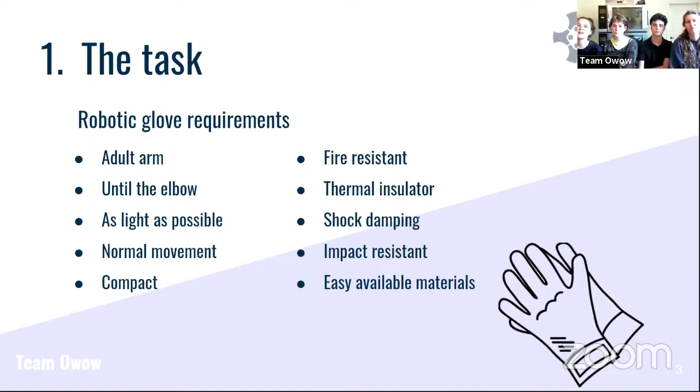We had to make a robotic glove with all these characteristics. It is a glove for an adult arm and it has to reach the elbow. It has to be as light as possible and the normal movement of the hand must not be restricted. When you are not wearing the glove, it has to be compact. Further, it must be fire resistant, shock damping, impact resistant, and heat resistant. It also has to be made from easily available materials.

In order to make this glove as compact as possible when folded in, we chose a two-part design. The hand itself consists of a few layers to deal with heat, fire, and impact, which will all be explained in a minute. The arm is a strong structure that functions as a compact, retractable storage space. The design will allow us to make the hand flexible and fully articulate, but also provide excellent protection due to these layers and the black knobs on top of the hand, which will distribute the load of an impact to a larger area.

All of this whilst the arm remains completely guarded from heavy impacts and heat sources. When not needed, the arm structure retracts in a telescopic manner. This makes it a compact cylinder in which a sleeve and a hand can be stuffed. Since you have two hands, the retracted cylinders can be attached to each other with leather straps.

Now I will describe all the materials. I will start with the hand part of the glove, describing the structure layer by layer, starting with the first layer, the one closest to the skin. The first layer is a sport compressive glove and sleeve. It is elastic, breathable, absorbs your sweat, and absorbs shocks, which makes it very comfortable and a perfect first layer for our Glow-Wow.

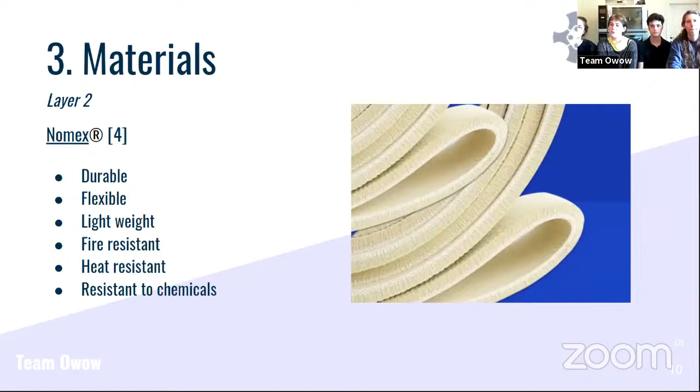The next layer is Nomex. Nomex is especially known for its good properties against fire and heat. It's used in almost every suit of fireman or firewoman, so it's very well known for that. It's also durable, flexible, resistant to chemicals, and lightweight.

The next layer is Kevlar. I think everyone knows Kevlar. It's a very good material, resistant to cuts, and like Nomex, also fire resistant, chemical resistant, and flexible. That's the top layer of our glove.

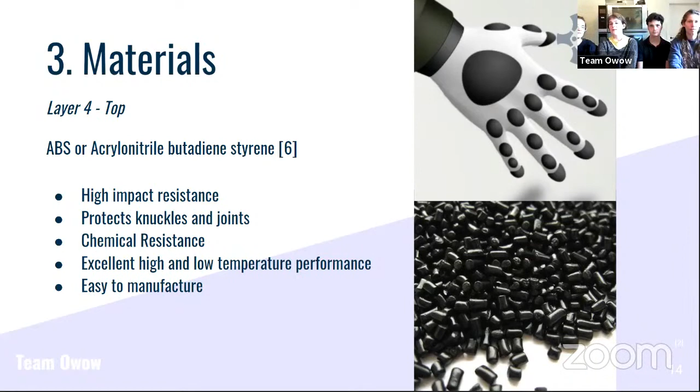The next layer is different for the top and the palm. The top has to provide impact resistance against high impact, and we use ABS for that. It's a strong plastic, and as you see in the image, the ABS is in little black dots just above the knuckles and the joints to protect them. Because it's only there, you can still move your hands naturally and it won't disturb any movement. ABS is also chemical resistant and performs excellently in high and low temperatures. It's also easy to manufacture, making it a nice material to protect the knuckles and joints against high impacts.

The palm of the hand will provide damping and absorb vibrations. The material has a superior damping coefficient, and it's also resistant to fire and chemical solvents. The material we use for that is sorbothane. It's a rubber, and as I said, it absorbs vibration and has a superior damping coefficient. It's also durable.

And the sorbothane layers are placed in strokes on the hand, and between the strokes there is air, so you can still move your hand like this, and no material will be in the way for your hands. So we use that material for the palm, and then we're ready to go to the next part of the glove, the sleeve, and I will give the word to Anka.

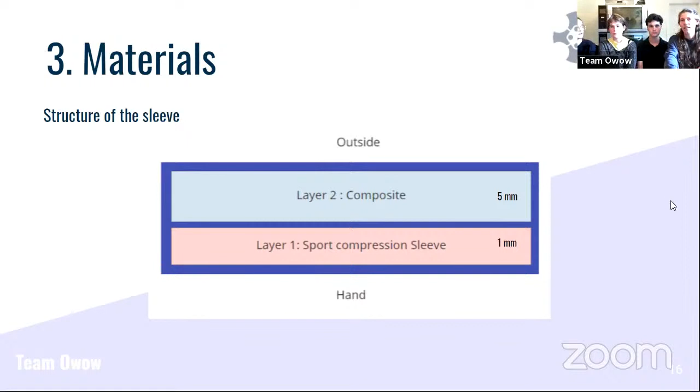So the structure of the sleeve consists of two layers. The first layer is the sport compression sleeve, as Polly already mentioned, which is comfortable on the skin. And then on top of that, there is a hard layer of composite. We wanted a lightweight material that was impact resistant and fire resistant, so that's why we chose the composite Duplicor. An additional advantage is the price and the ecological aspect.

Now, a recap of our concept. Our product meets the task requirements like being compact and heat and fire resistant, but it also has extra advantages like being cut resistant, breathable, and sweat absorbing. So that was our concept. These are our sources that we used, and that was the end of the presentation. Thanks for your attention, and now we're ready for the questions.

Okay, who is first for asking? It's me, maybe? As you want, no, yeah.

Congratulations on the presentation, you have designed a very nice glove, and I think it could be a possible solution, but I didn't understand what kind of people would be the users of this glove — just protection against heat or against fire? And about fire, I disagree about Kevlar in fire protection, because the maximum safe working temperature for Kevlar is 315 degrees. So maybe there are other options, and a mix between Kevlar and carbon fibers could be a nice option, but not just Kevlar alone — just so you know. And my question is, this glove is not interacting with the neuronal parts of the arm, is it?

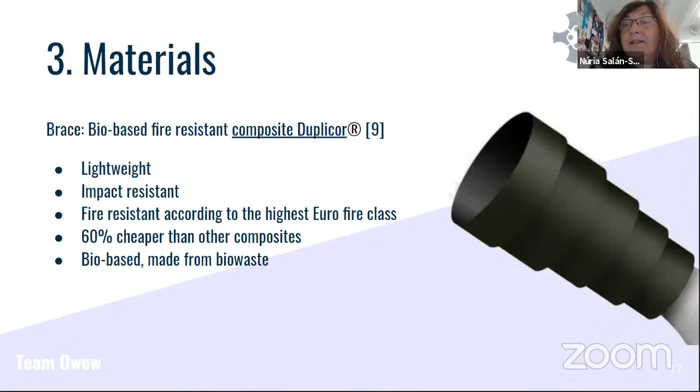No, it's not such a smart glove, it's just to protect you against heat and fire. And about that Kevlar thing, I think Kevlar is knitted into our glove, and if you knit a material you can add other fibers that make it extra fire resistant. So we can add to the Kevlar to make it more fire resistant, and we'll have the cut resistance also in combination. Okay, great. And maybe you know, Kevlar was invented by a woman, Stephanie Kwolek — she was the inventor of Kevlar, the best invention ever.

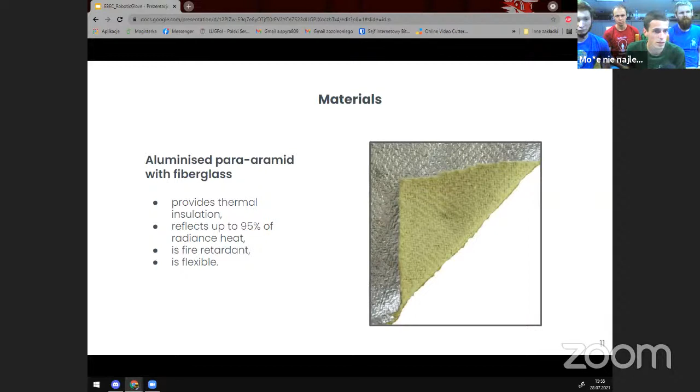The middle layer is made mainly from rock wool. It's the main insulator of the composite. It is very compressible, and that feature is used for active thickness control.

Another material used in the middle layer is silicone. It is used to create airtight tubes around the rock wool and most of the pressurizing system.

The next material is PBI, which is highly resistant to fire and chemicals. It is used in firefighter and astronaut suits.

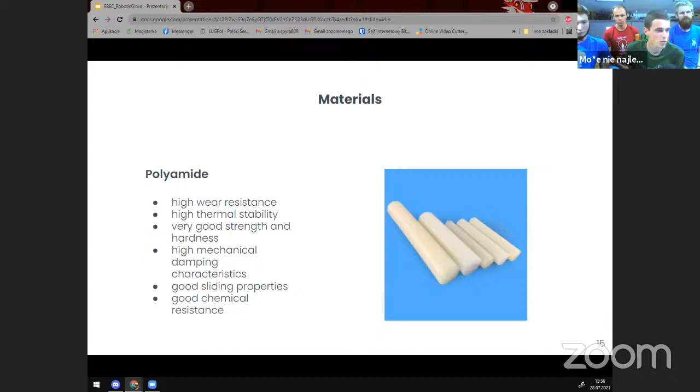Another material used in the middle layer is polyamide. It is used in small strips to grant impact protection. While being strong, it does not break, and it can be bent.

The wool and polyester knit is used on the very inside of the glove. It is very nice to touch, breathable, and naturally prevents odor.

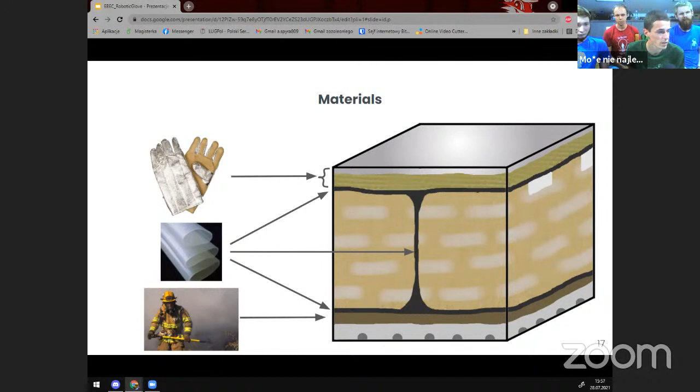The silicone walls create the chambers and make sure the wool is evenly compressed. The polyamide ribbing is placed together with rock wool inside the middle layer. The material on the inside is soft, comfortable, and prevents excessive sweating. Grooving in the polyester wool composite helps with air circulation.

The electronics technology used is commonly found in consumer electronics. The air pump can be made from coils and a silicone bubble, making the whole system flexible and able to be rolled up. In case of electronics failure, the glove can be hand pressurized.

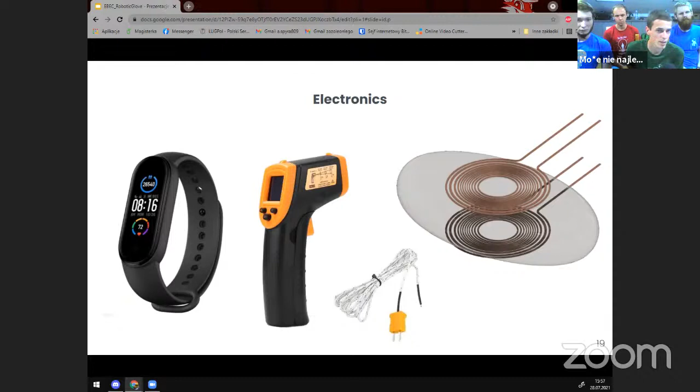We have designed the glove with regard to the presented requirements. Every requirement was considered when the design was created. When it comes to size, the air chambers are resizable depending on the demand. The only rigid parts are placed in horizontal strips, and together that means the glove can be easily rolled up.

Regarding the materials, the ones used are tested and proven to work in extreme conditions. While they are specialized, they are produced in big quantities and can be easily obtained.

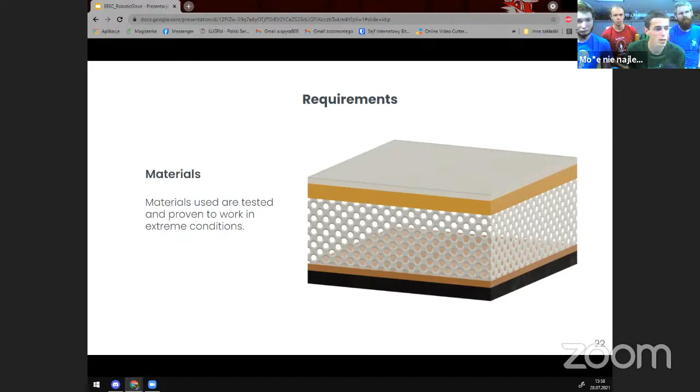Concerning the weight, thanks to thoroughly chosen materials and design, the gloves are lightweight. The rock wool filled air jacket used as the main insulator does not increase the weight of the product, and the total weight sums up to below 450 grams. That is around 25% of the weight of a human arm and will not be tiring to wear.

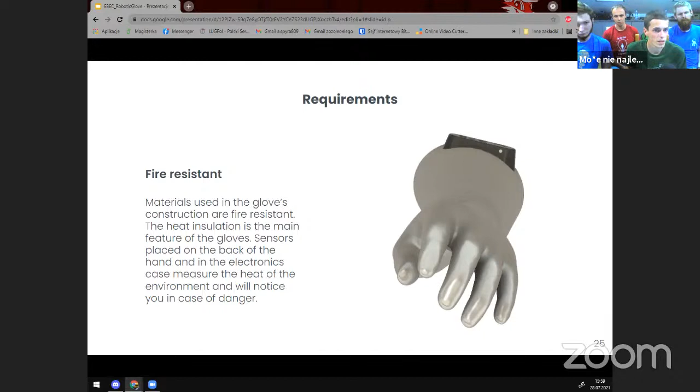While the materials and technology used in glove production are well developed, they are also fire resistant. As we said before, there are sensors placed on the back of the hand and the electronics case. They can measure the heat of the environment and notify you in case of danger.

Concerning shock absorption, the vibrations are dampened by the air jacket and other soft layers significantly. There are no hard materials directly in contact with the operator's hand. When it comes to impact resistance, the air jacket combined with the polyamide ribbing absorbs the impact and spreads it over a greater area.

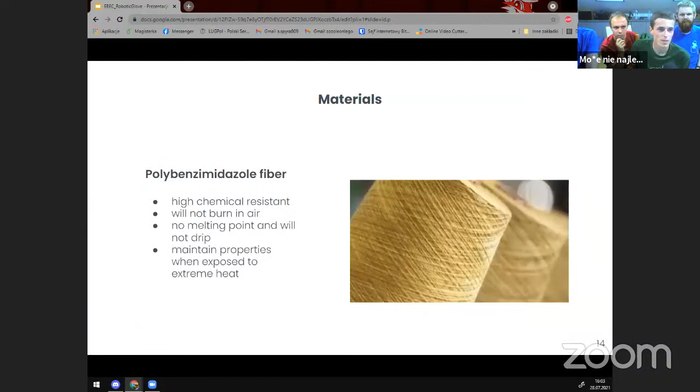Something I don't really understand is how can you adjust the thickness of the whole glove. I understood this is by air pumping, but how big is the system you need and where is it placed into this, let's say here on the presentation? The pump is in here, and basically the whole structure is made of, maybe you have a photo here.

It's like tubes of wool, and inside is rock wool, so it's a very soft material that can be compressed like 10 times. The pump can work both ways: when it is vacuumed, the wool is very compressed and it's like a tight glove, but when the chambers are pumped full of air, the wool expands with them, and the outside material isn't that hard, so it can fold a bit. With the air inside it takes the bigger shape. I see.

So here's what I wanted to come to, related to Nuria's question about impact resistance. I agree that once you have air, you have some dissipation of the mechanical waves, etc. But my question is, as soon as you are impacting that, how good does your pumping system have to be to trap the air?

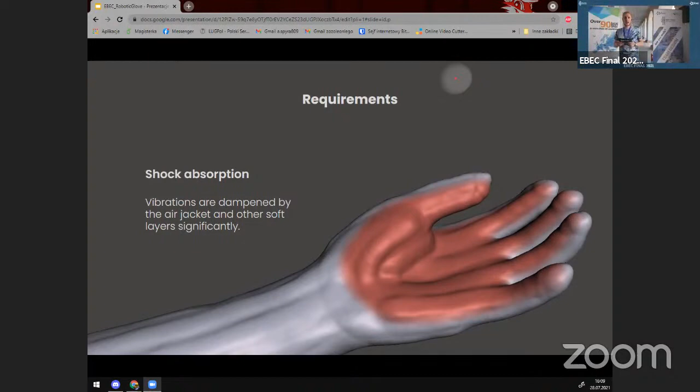Thank you very much. So I will wait for my teammate to share the presentation, and we shall begin. Yeah, I'm working on it. So you should be able to see my screen, right? Okay.

Hello everyone, we are Team Krolog from Brno, and we'll present our solution. I'm Filip, Team Tech Captain. Next to me is Kubo. Hello, I'm Kubo. Also in our team there is Lucas and Dominic.

Moving on. When we started researching for our glove, we took inspiration from many things, like the ordinary work gloves everyone probably has at home, and also it had to withstand forces like impact forces and vibration. So we took inspiration from the armadillo, the small mammal, and also from knight armor.

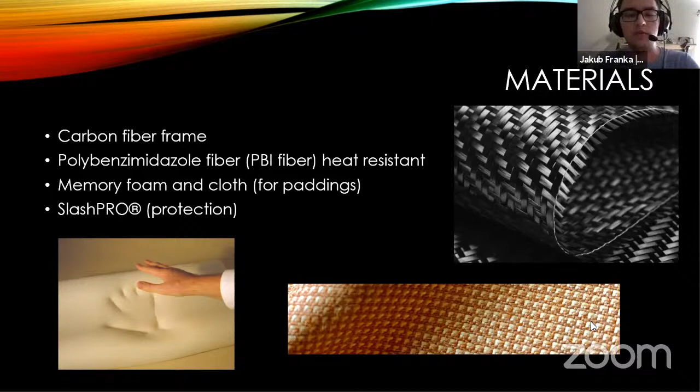Next slide, please. When it comes to materials we used, for the main armor part we used carbon fiber for the frame. We also used PBI fiber, polybenzimidazole, for the heat resisting parts, and for the insides of the carbon fiber frame we used memory foam for comfort and vibration absorption. We covered the entire glove in protection against knives and sharp impacts.

Here you can see the glove, sort of half disassembled. It is built out of three main parts: the hand covering glove, which is built almost entirely of fabric with armored inserts, which is then connected to the forearm impact cover, which helps against heavy impacts and sharp impacts. The inside of it is covered in memory foam, and then the heat protective sleeve is pulled over this impact cover.

Here you can see the layers of the fabric used for the glove and the heat protection sleeve. Here you can see the glove when the heat protection sleeve is pulled over it, and the insides of the impact protection sleeve, also the memory foam inside of it. We also put an armor insert into the glove, which helps protect the upper part of the hand.

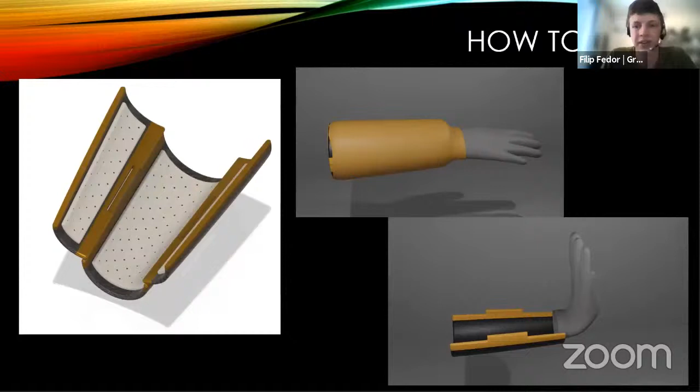Next slide. As you can see, there is an open forearm cover where you put your hand and pad on the glove, then close it, and finally slide on the sleeve. As you saw on the last slide, the whole fabric part can be folded inside the rigid part of the glove, as seen on the video on the bottom right.

Next slide, please. We designed our glove to fit my hand, which is quite big, but in case of bigger manufacturing, we would provide them in standard sizes of gloves, so from 8, 9, and so on. So we will use the standard size for the gloves.

We use a classic water cooling circuit with external cooler, coolant tank, and pump for circulation of coolant, and cooling is necessary for better heat resistance and more user comfort. Next slide, please. It is also, of course, optional because the equipment required for this is quite heavy, and it's better if you want to be lightweight to remove this.

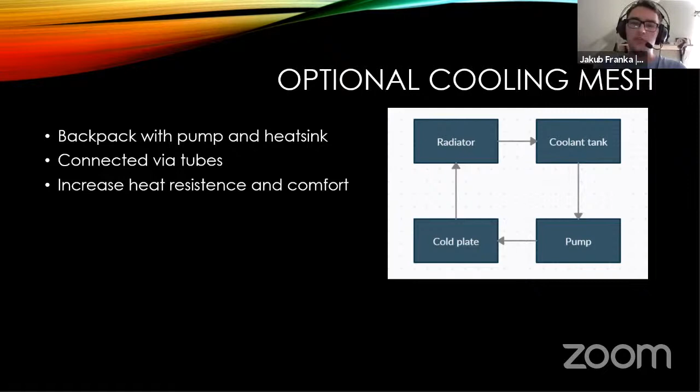So the whole glove is equipped with points to attach the hoses, and the whole cooling mechanism would be on your back in some sort of backpack.

And we also designed a heavy-duty version of our glove. This is more armored and provides better protection and endurance. On the other side, it has limited finger movement. It can be used for special applications with extra hazard of injury.

So that's all from us, and we will be glad to answer your questions.

Boys, thank you very much for your presentation. And sorry, excuse me, I didn't realize to ask about the weight of the elements.

Well, we considered using the most lightweight elements, but for example, the fireman gloves, which we based our design heavily on, weighed approximately 300 grams, I'm not sure. You can say it in pounds. No, well, we use the metric system. The metric, perfect for me. I'm from Spain, so metric is perfect for me. We're all from Europe, so most of us. How many grams?

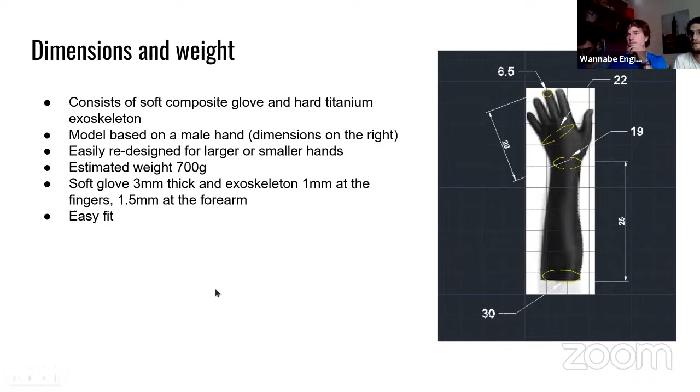Now, the composition of the soft glove. The base layer is neoprene, for shock absorption and comfort. The other layer is 2 layers of Kevlar, which has very high tensile strength and low thermal conductivity. On top of all that, there's a silicone coating spray, which can stand high temperatures, is flame retardant, and if it's damaged, it can be reapplied.

In the hand, we skip the neoprene layer to make it thinner and more agile. On the thumb, it's embroidered with conductive thread, which allows the use of touch screens. All the materials we've used so far can be easily found on common marketplaces.

This is the metal exoskeleton, which protects from hard impacts. The floating finger joints are attached to the fabric with Kevlar stitches, and the box on the back... okay, what's happening? I have a problem with the presentation, sorry.

And the box on the back is a surprise for later. The forearm armor is made of 1.5 millimeter thick light titanium sheet and is designed to fold towards the arm, the hand, like that, as you can see in the video.

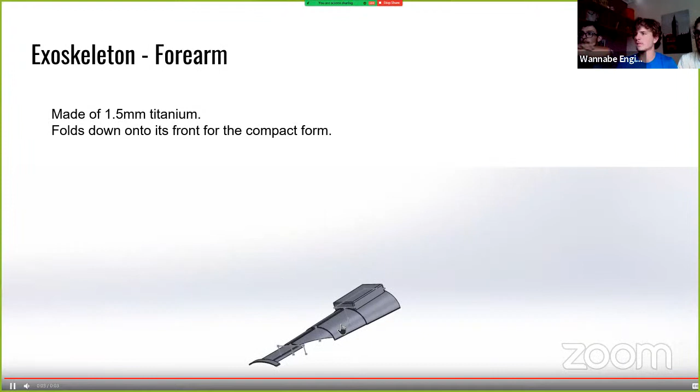So we could have ended it here, but instead we decided to get creative and a bit childish. So we now present our spiced up kitchen glove.

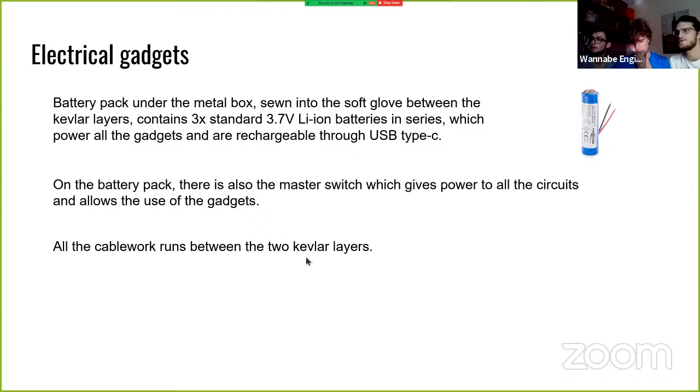All the electrical gadgets you'll see are powered by 3 lithium-ion batteries, which can be recharged with USB Type-C. On the battery pack, which is under the box mentioned earlier, there's a master switch which powers all of the circuits and allows the use of the gadgets. All the cable work runs between the 2 Kevlar layers.

So, how do all the gadgets work with the gestures? How do we detect when a finger is closed? Well, there's a metal plate on the end of each finger, almost each finger, and a metal plate in the palm. So when you close that finger, they make contact, and the logic board gets that signal.

We also have a laser on the index finger, because that's the finger with which you point, and it activates when all other fingers are closed.

Also, we do have a lighter. It's positioned on the thumb, and it activates with the thumbs up gesture. It's an electric lighter, so it produces a spark, and then our LPG tank, liquefied petroleum gas, provides enough gas to keep the flame going for as long as you keep this gesture.

We also have a non-electric gadget, a screwdriver, because we are engineers. It's positioned on the pinky finger, and it's also detachable, so you can change heads.

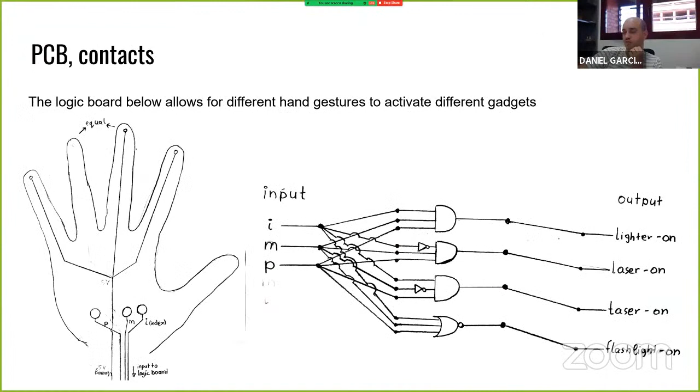I have actually worked on impact response of different plates for very high impact, and we considered aluminum and titanium. To be honest, I agree that probably regarding just the stiffness, tensile strength, etc., with titanium you are more than okay. Not sure, maybe regarding—because you have a kind of flame, right? For one of the—by the way, I can do it. Nice.

Okay, so regarding this, I was wondering about the fire resistance of all the surrounding elements there. You mean the fire resistance of our gadgets? Yeah, so all the surrounding tissues.

Well, okay, so about the laser, there are industrial lasers even used in nuclear reactors, so we're sure we can find one that would be completely fire resistant. Also, the taser posts are just metal, as are the screwdriver and the LED, so we would find some metal that would be fire resistant enough. The only problem left is the cable work, so that the insulation doesn't melt — that can be made with fiberglass, which is quite fire resistant.

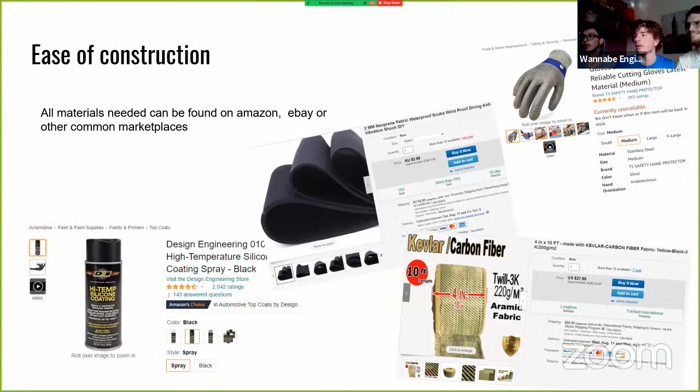So of course the gadgets are optional. Our initial design was the previous one we showed. We're sure they're not that resistant as a glove itself, but the glove itself we think is feasible. All the materials we used, we could find them on the internet. These are screenshots from Amazon and eBay, literally.

Now, putting all the cable work between the two Kevlar layers would be somewhat tedious, but it's fun, it's worth it. I have more questions, but I think we're running out of time.

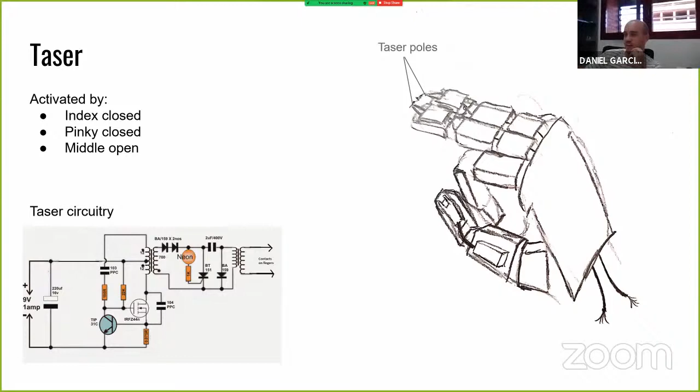So congrats again, I think this is quite creative. I don't know if Andrea wants to add anything.

I also would like to congratulate. I think the work is nice and the presentation was very enjoyable. I would also say it was also fun.

One little comment I have is related to the lighter. If you're in the middle of a fire, you're probably not willing to smoke a cigarette or something. Also, I am afraid the liquid gas there might be risky if you have an impact on top of it and the gas escapes. Also, if you have a fire, it's not a nice idea to have something on your finger which can explode somehow.

Yeah, that's completely true, we agree, but it was just for fun. We wouldn't suppose that firefighters would wear this glove with the lighter equipped.

But okay, thank you very much. Thank you. Okay, thank you. Bye-bye.

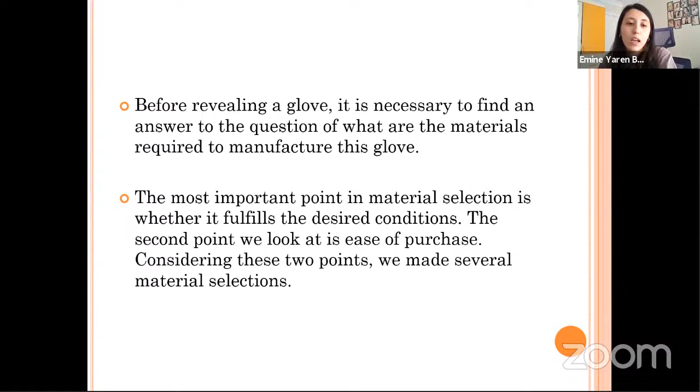Considering these points, we made several material selections. The first one is Kevlar. Some groups use that, and Kevlar is the material inspired by the structure of the spider web. The spider web is the strongest material in nature—it is 5 times stronger than steel of the same weight. We can look at the picture of the Kevlar.

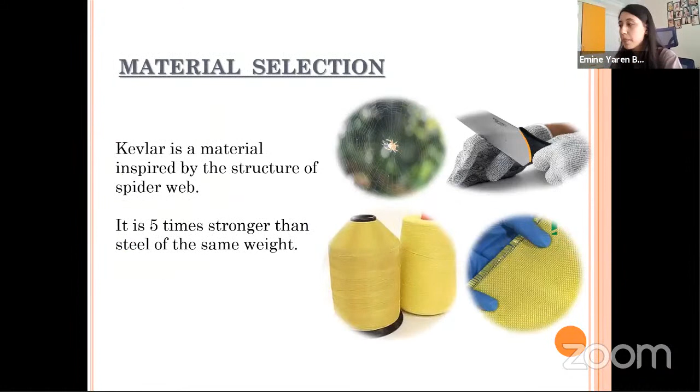Next page, thank you. It's light and extraordinarily strong, with high strength and high cut resistance, low electrical conductivity, high resistance to high temperature, and high chemical resistance, with a thin filament structure that withstands very high tensile stress. You can buy and weave different lengths of yarn, as you can see on the website—you can supply it there.

But we may have issues with D3O material collection, that's why we didn't want to use this material. We decided to use rubber instead. Rubber has shock absorbing properties. It can be produced in different hardnesses according to the content in the mixture. In this way, it is used in different sectors.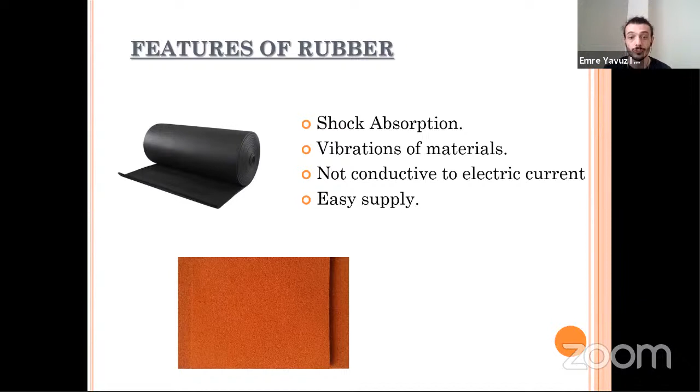The absorbent properties of rubber make it a useful substance in automobile suspension. Rubber also dampens the vibration of industrial materials. In addition, rubber isn't conductive to electric current, and therefore it can be widely used in areas such as insulation and isolation. In terms of availability, it can be easily found in the markets.

Temperature control fabric. We decided to add fabrics that can change color with heat to the glove. However, we did not use the fabric on the entire glove, considering there is a possibility of ignition in the opposite situation. We added it as stripes for the indicator.

Why did we add this? Let's imagine that many people will use the glove in different work areas. Everyone's heat threshold isn't the same. For this reason, next please, so you'll be able to see the color changes.

Next, touch screen feature. At the same time, we added fingertips to the glove which provide ease of use with touch screen. We think this is an important need in today's world.

For example, some workers in industry work with CNC machines, but they work by removing their gloves because the use of gloves isn't suitable for touch screens and doesn't offer comfortable movements. As a result, we encounter occupational accidents such as loss of hand or limb.

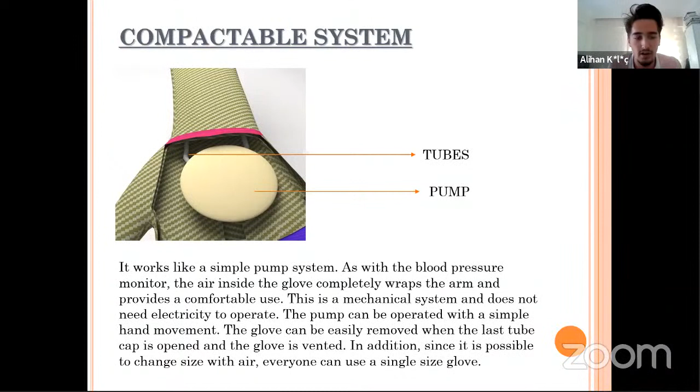This is a mechanical system and doesn't need electricity to operate. The pump can be operated with a simple hand movement. The glove can be easily removed when the last tube cap is open and the glove is vented. In addition, since it's possible to change size with air, everyone can use a single size glove.

It's the working principle of our design pump system. In the example animation, you can see that the pump is inflated and deflated.

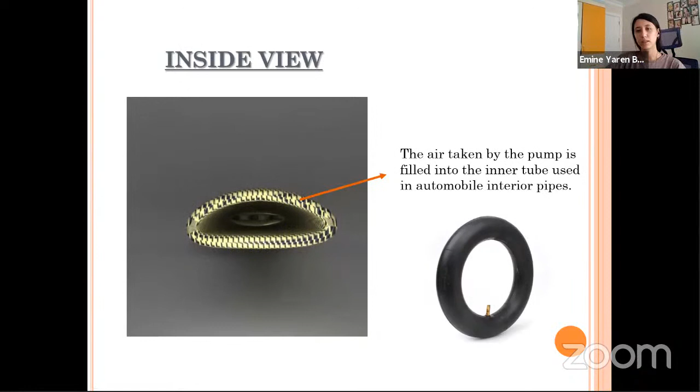Okay, this is inside view, this is the principle of the working. The air taken by the pump is filled into the inner tube. Inner tube is a word in Turkish, but what can we explain in English exactly?

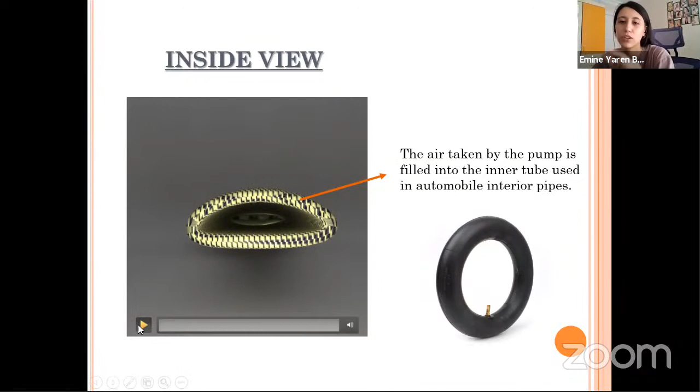This is like this, but we can use the term, like the balloon. It's the layer of our gloves. You can see the size of our layers. We use less than 10 millimeters.

Rubber, Kevlar, air. Inner tube is included as shown on the previous page. The types: a twice layer of polyester and cotton.

We use that because the inner tube or Kevlar can be harmful to the skin, so we use polyester and cotton - no, not cotton, because this can be burned.

Last page. The design of our glove. You can see the rubber. We prefer to place the rubber because of the freedom to move your hand.

These are some codes, our materials. You may find some pieces of these on the internet. Some features like that.

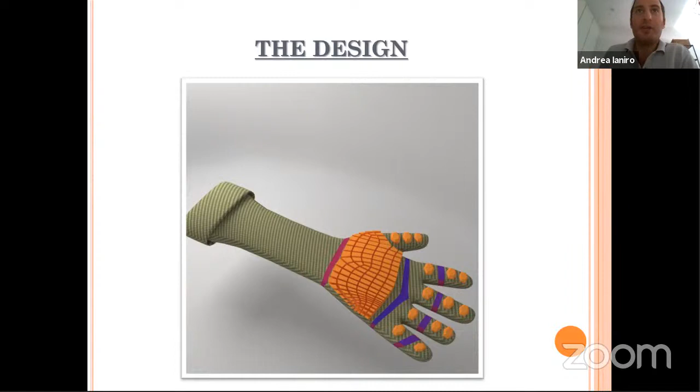I agree with Daniel, and I would have also used the non-Newtonian fluid to better absorb the shock. If I can say, I really like that you included the budget, which shows that this device, although perhaps less complicated than others, is very cheap and affordable. I like that.

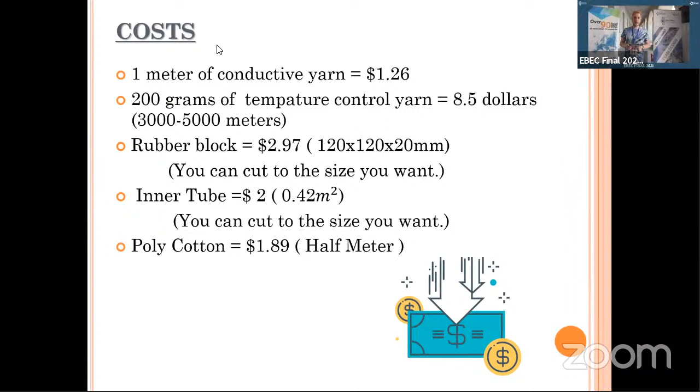So can you see us? Yes, okay. Can you see the presentation? Yes, perfect. Okay, so yeah, we have it, already done.

And what was our task? Our mission was to create a lightweight, shock, impact, and fire-resistant glove that, moreover, would be even foldable.

So how did we manage to do this? We decided to make a three-layered design, a three-layered construction for the glove. It has thermal and mechanical protection, shock and impact protection, and a layer for user hand comfort.

This glove is made of lightweight materials, and there are stiff zippers to put this glove on easily and to take it off.

So what about the outer layer? We decided to make it of meta-aramid, or how it is called, Nomex. We decided between two materials, Kevlar and Nomex. Kevlar is also good for thermal protection, but Nomex is much better, and it's used by firefighters, and it's easily accessible in a household.

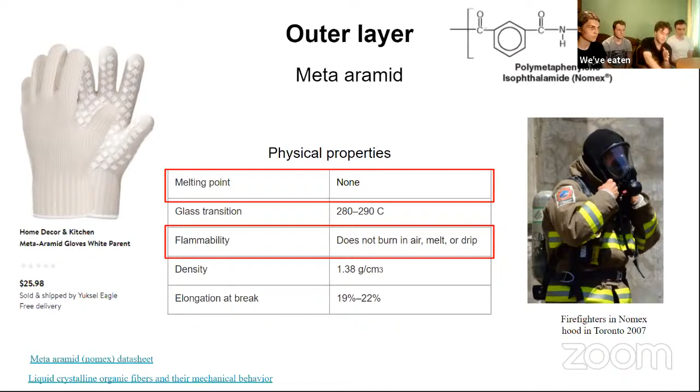As you can see, it could be bought in Walmart, and it has perfect fire protective properties. Let's see the tests.

But what about shock and impact? We looked at different anti-impact materials, but most of them have drawbacks such as being rigid, restricting movement, and being heavy.

So then we switched to D3O. It's a revolutionary material that is soft and flexible in the normal state, but when high pressure or force is put on it, it becomes very strong and disperses all the force. After that, it just returns to its normal state.

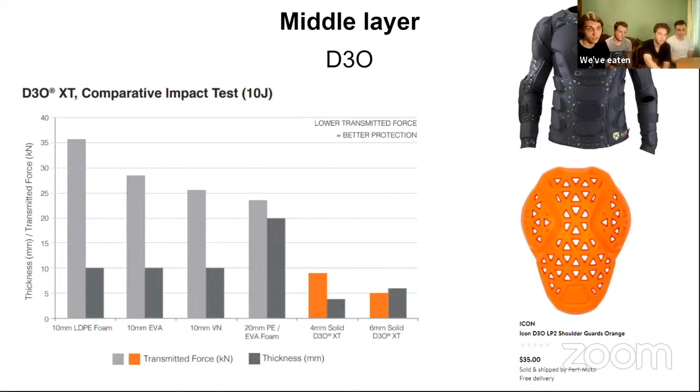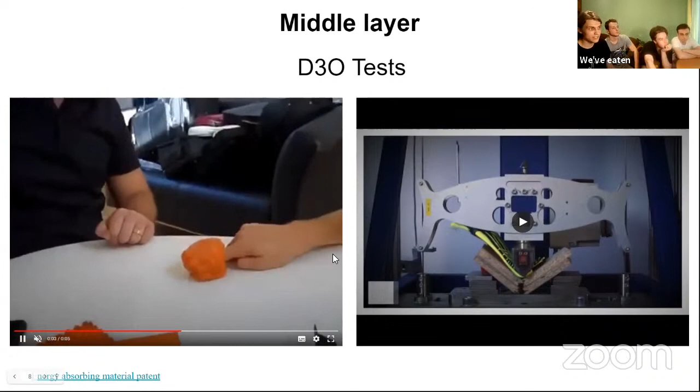As you have seen, you can buy it, for example, in motorcycle shops. Let's look at the test - this guy feels great, and his finger too. And what's more important, in this test of different gloves we looked at different materials like this one, but now look what D3O is capable of. Pretty cool, no?

Okay, so for the third layer of our glove, we decided to pick cotton because it is comfortable. It is also hypoallergenic, and we picked it because it is low cost and easily accessible around the world, so it is not a problem to get this material. Another great property of cotton is that it is eco-friendly, so it can be very easily recycled.

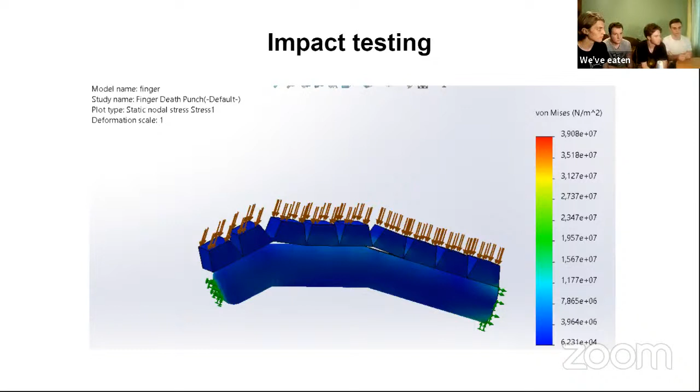So what about impact testing? Here you can see the finger test. There is pressure on the finger comparable to a 2 kilogram material being thrown on the finger in our glove. We ran the same test on the forearm part of our glove, and the results are almost the same as for the fingers.

Okay, now look at our virtuoso. As I said, our glove doesn't restrict any movement, as you can see. He even couldn't play the guitar before he wore it. And as we said, we didn't make something that exists only in a virtual environment. It exists right here, a real device that, despite being made of other materials, has great protection from impact, temperature, and other stuff. Thank you for your attention.

Well, boys, congratulations. I think it's been the most feasible option so far. So congratulations again. Thank you.

And I love your outfit for playing guitar. I'm kidding. My question is, how easy is it to have different sizes? Your hand is your size, but people have different sizes - small, medium, big, extra big. So how difficult would it be to have different sizes for this kind of glove?

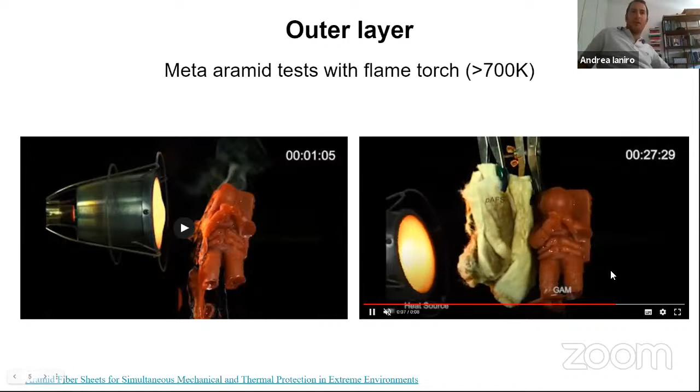Well, but here it's a radiative transfer, and you have emissivity and so on. So in your simulation, it's 6 minutes. Yes, yes. Okay, excellent. Thank you. Okay, thank you very much. Thank you. Thank you for the good words, we really appreciate that.

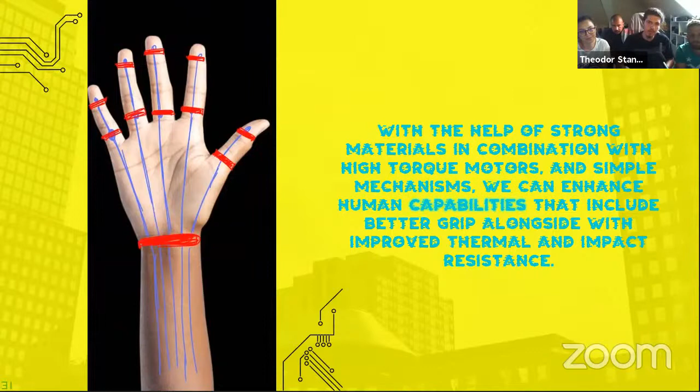With the help of strong materials in combination with high torque motors and simple mechanisms, we can enhance human capabilities, including better grip alongside improved thermal and impact resistance. For a better design and to ensure proper dimensions, we scanned one of our friend's hands to have it as an accurate 3D reference. This process was made possible with the help of photogrammetry.

Our device is comprised of tungsten wires, PTFE tubes, a control box with electronics, 5 high power servos, and a 3-layer sleeve through which all of our components go. The mechanical design is based on already existing principles used in things like bikes and other widely used pulley systems like the BOA, a self-tightening pulley mechanism used in sportswear and clothing.

Tungsten wires go through the tubes that connect the tip of the fingers from above and below, with the wire being wound on a pulley system on each motor. This way, one servo can control both directions necessary for extension or retraction of the fingers.

In addition, the motors are rated for 25 to 30 kilogram-centimeters and work in a closed loop. Electrodes embedded in the sleeve monitor electrical signals as secondary input for the motors, gaining precise control for each of them.

The sleeve is made out of 3 layers, as you can see here: an outer aerogel-infused textile for heat protection, a middle layer made out of Sorbothane for impact absorption and dissipation, and an inner fabric layer for comfort. The total thickness of the sleeve alone is less than 10 millimeters. The Teflon or PTFE tubes run throughout the Sorbothane layer so they don't get pinched.

The wires are permanently sewed to the inner layer, and length adjustments can be made by winding the wires more or less on the pulley system. Our total weight is about 250 to 300 grams, most of the weight being comprised of the control box and servos. Last but not least, a flexible LED light is fixed upon the back of the hand for quick access to a light source.

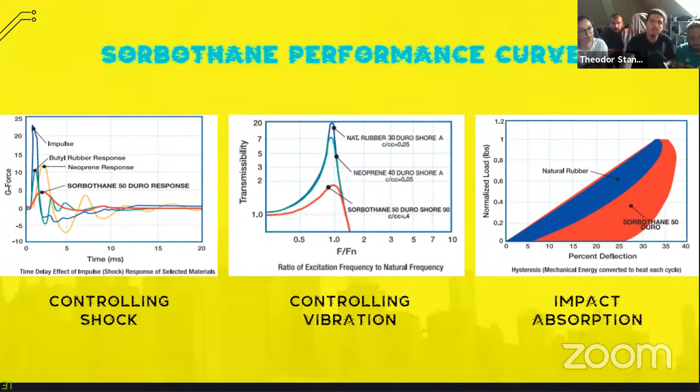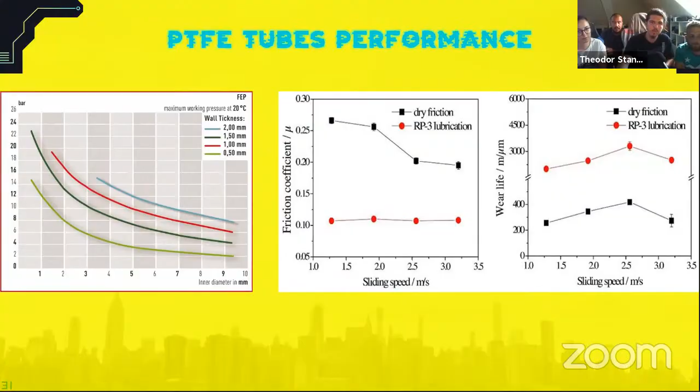The 3mm outer diameter PTFE tubes provide excellent dry lubrication for the wires, Teflon having an inherently low friction coefficient. Tungsten wires provide mechanical actuation of the fingers while also ensuring very high tensile strength, which is important to prevent them snapping under continuous stress.

To make the Cyber Touch as versatile as possible, the motors actuate in a closed loop response based on the rotation of the pulley at every finger's move. If you extend your finger, the wire on that side extends, making the pulley spin and initiate the servo. To ensure precision, electrodes were carefully placed along the forearm to monitor electrical signals.

Based on the intensity of the current flowing, the motors can lock up, helping with grip. The gloves are also equipped with grippy vulcanized rubber, touchscreen compatible pads.

Because we wanted this device to be used by many other types of people, we included a flexible LED light on the back of the hand. The light can be turned on with gestures that are recognized by the previously mentioned input methods.

Additional accessories can be developed in the future to enhance the ability, such as magnetic holsters, low power e-ink displays, and additional battery compartments or motor upgrades.

For most use cases, we decided to go for a high power servo, but depending on the necessary torque, smaller motors can be installed, making the control box shorter and even smaller overall.

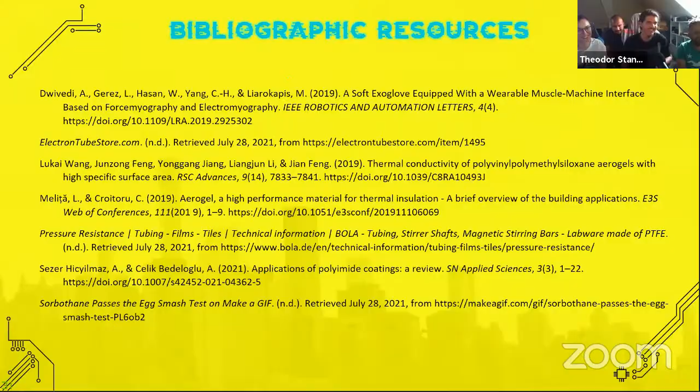Okay, congratulations, a very nice and clear presentation. Good job. And just a question, a curiosity more than a question.

Why tungsten wires? Through research, we found out that these have the highest tensile strength of the available wires on the market, or one of the higher ones at least that we found, at about 2,300 megapascals per millimeter square.

Yeah, that's true, but I think, maybe I'm wrong, tungsten is a very resistant metal in compression, but not in flexure or tensile, because it's so brittle. So I'm not sure it's the best option.

And I'll repeat what I said to the other team. Maybe it's the most resistant material, but what is the maximum stress that can be applied to your device? Maybe you don't need a tungsten wire, and you could consider a more common, more flexible, more ductile metal that isn't as brittle as tungsten. That's my question, that's all.

Sorry, I hope you like the information. Now we're gonna get a little bit serious about our prototype. So I'm gonna talk about the constructional solutions that we came up with to assure protection against some of the most common hazards.

The outer layer of our prototype is made from aluminized Kevlar fabric, which provides high temperature protection as well as vibration damping, since we know from other sources that this material works. We chose 1.5 millimeter thickness because, with the help of other materials, we'll also have extra thermal insulation capabilities.

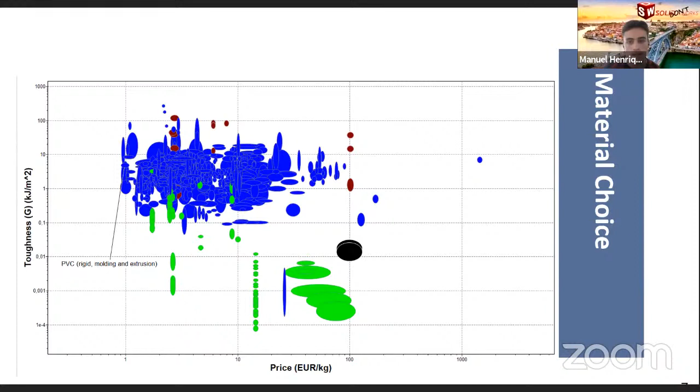We also compared the melting point of the previous materials, so the gloves can handle high temperatures. Based on these two graphics, we picked PVC because it can absorb impacts, it's cheap, and it has a decent melting point.

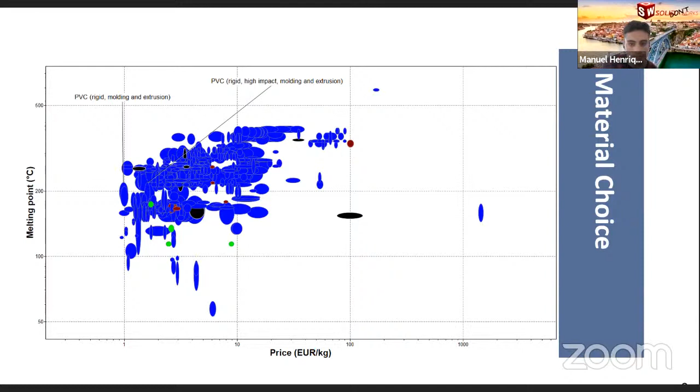Talking about the final design, it has 160 grams. The walls of the glove have 5 to 6 millimeter thickness, so they are easy to maneuver and use. The glove has a Velcro strap in the middle, and you can fold the glove so it fits in a small compartment.

One real question to ask is, why did we choose such a simple design? One of our main tasks was to have something we could easily manufacture and that would be really cheap. In a world where there are so many complex designs, we chose to simplify it.

We thought about other types of solutions, but we saw problems. For example, exoskeletons or telescopic solutions could run into problems in the future with a lot of use cycles. Ultimately we chose low weight with good material protection, simple to manufacture, and a beautiful design.

In terms of price, it's relatively cheap. The highest price was the Kevlar layer.

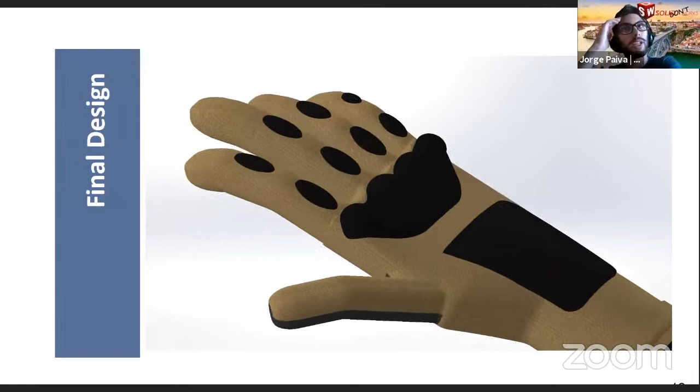To sum up, here is the ultimate glove you need. Lightweight, and it protects all your arm and hand from fire and heat thanks to the layer construction. It's capable of protecting from impacts, vibrations, and sharp objects, thanks to the Kevlar layer and the polyethylene foam on the critical zones. It's comfortable thanks to the cotton inner layer, and it's super practical to store with the Velcro movable sleeve and the maneuverability that allows it to fold completely. It fits just like a smartphone in your pocket.

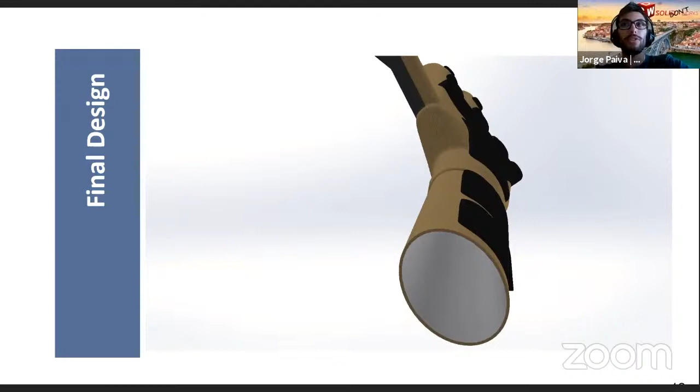So I think this option could be as easy to get as in your commercial movie. And my only question is... I have no questions, it's just like a comment. Do you think it could be possible to have a glove like this in a laboratory for working, in practice, in academic activities, in an easy way, or at home like that woman who was ironing?

And I must say to you that men can iron also. It was me, it was me.

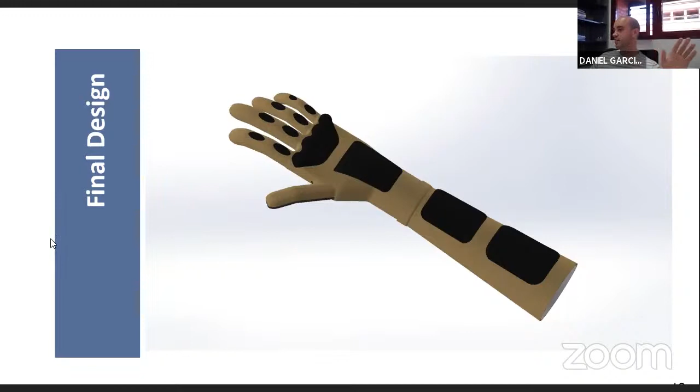Okay, congratulations for the presentation and the design. I actually have kind of contradictory feelings. On the one hand, from the scientific part, I think this is quite simple, but that's true because this is your purpose, right? On the other hand, the marketing stuff is extremely good. I really like it, and I feel that Mario is the one risking his life, cutting and doing the whole stuff in the video. So now let me give you a shot: try to tell me in half a minute, more from a technical point of view, 3-4 reasons why your design is better than others. I got the marketing bit, but now from a technical point of view, try to sell it to me.

I think one key point, as the competition asked, is the fire resistant part. The aluminized Kevlar fabric really makes a difference, that should be one point. And maneuverability, our design is really good on that key point, which was important. It was one of the most feasible solutions we came up with this afternoon. We also truly believe that the PVC plus polyurethane foam is a really good solution for absorption, and it's a really easy one too, quite easy to manufacture.

Okay, last question: if you need to change something, or if you can change something in your design, which change would you propose? That's a good question.

Regarding the impact aspect, from the technical side, I actually tried to predict the impact behavior, but those kinds of nonlinear dynamics analysis are difficult to do with the normal software we have, since not everyone has software capable of running those types of simulations, and given the lack of time it would be very difficult to prepare such a study in such small time conditions. However, if we could improve the impact aspect of this glove, we could extend the protection layer to the whole arm. Of course we'd have to discard some mobility, or we could change the material to something more resistant, like PEEK, or as was said before this afternoon, some non-Newtonian fluid or something like that.

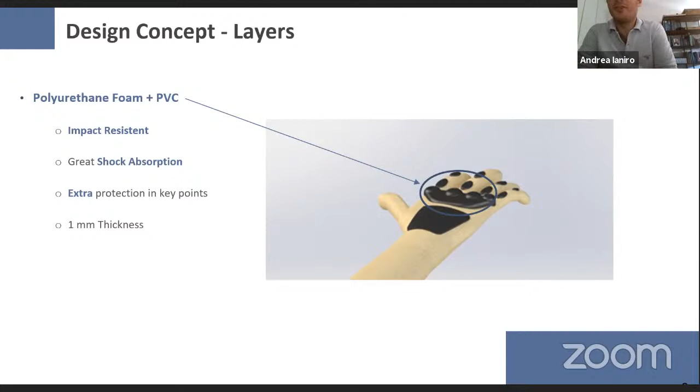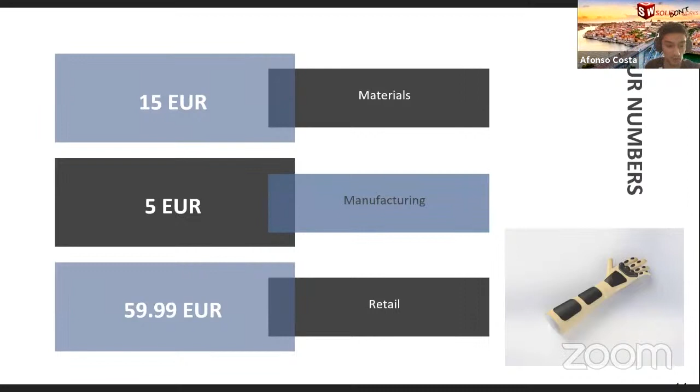Oh, we ran some numbers, it would be relatively cheap. The PVC is real cheap. The highest cost would be the Kevlar material. The problem here would be the quantities of the materials, right? The problem is not how much the materials cost, because the materials used are relatively cheap. PVC is cheap, the most expensive material used is Kevlar, which is like 25 euros per square meter or something like that. The problem here would be the manufacturing prices, but if you could make it at large scale, it would be a relatively low price for the kind of protection that we offer. Okay, thank you very much.

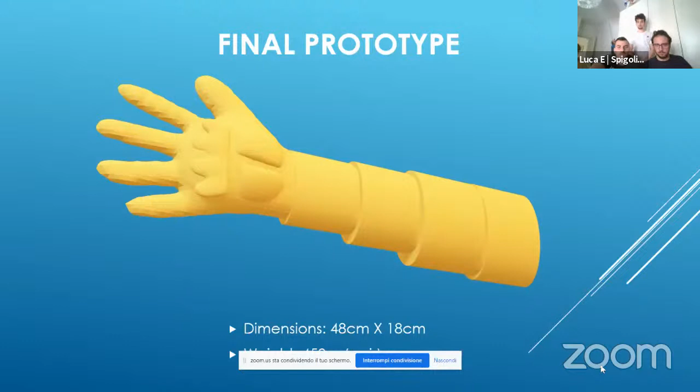This is our prototype, and as you can see, in the lower part of the slide, here are the overall dimensions and also the weight of our prototype for a pair.

Regarding the material used for our prototype, we made it of different layers. Each layer has a specific function to satisfy a different customer requirement. In particular, we paid a lot of attention in the positioning of the layers, because if you use the wrong positioning, the glove will change its features. In total, we reached a thickness of 8 millimeters. But now let's move to the layers in the specific.

Okay, so let's take a closer look at the single layers. The outer layer is called outer shell, and is composed of a fabric of multi-filament technology of Kevlar and Nomex in order to achieve exceptional strength, flexibility, comfort, and exceptional thermal properties.

Then we have a thermal layer that is under the first layer, that is a key layer to insulate the user from the fire, from the outer things that could harm the user. And it's very important. It's composed by a batting of Nomex E89 and a fabric of Nomex.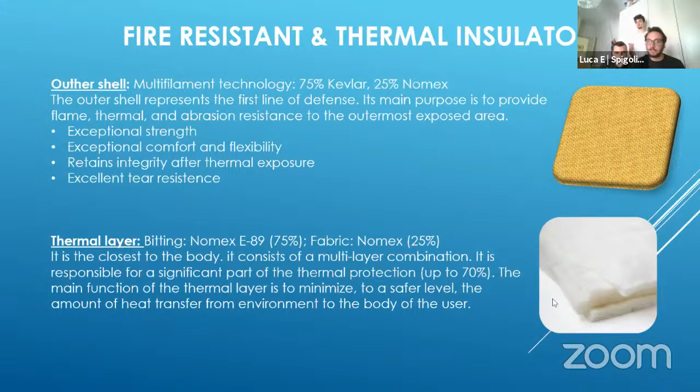Then we have the impact resistant and shock absorption layer. This layer is composed by a viscoelastic foam with memory effect. We decided to use this material because we searched on the internet, and this material had exceptional properties regarding impact absorption.

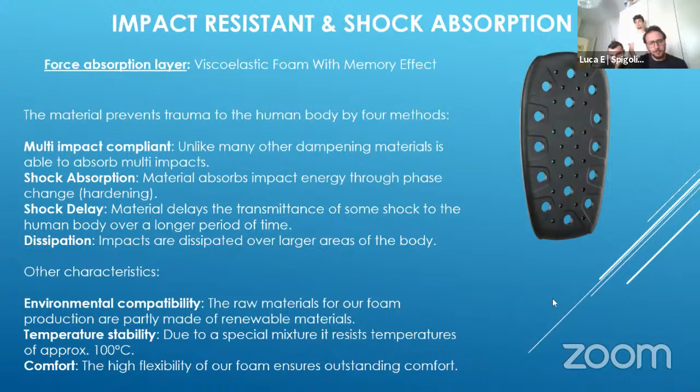It is also impact compliant, and it is able to dissipate energy during impact, protecting the body of the user. It also has a lot of interesting features like environmental compatibility, temperature stability that is very important in a glove that has to resist fire, and then last but not least, comfort.

We decided to position the layer, as you've seen before, in a strategic position. So on the arm, where the user could be beaten from something, and on the palm of the hands, and also on the back of the hands, in some padding.

Okay, so let's talk about comfort. Comfort for sure is very important for a glove, and this is the reason why we add in the inner layer a layer made of cotton, which for sure has a good feeling on our skin.

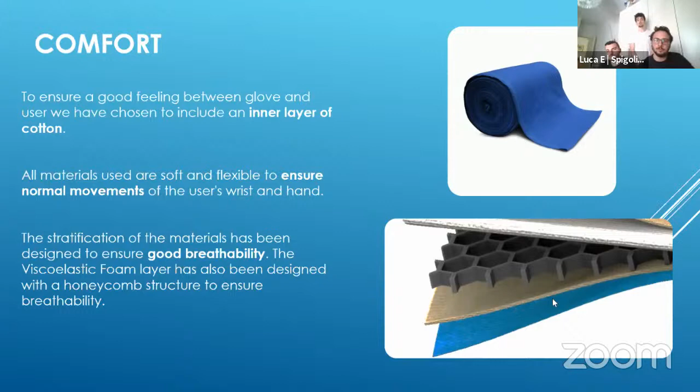All materials that we use are flexible, and this is very important to ensure for the customer the normal movements of the hand. Also, breathability is very important for gloves, and this is the reason why all the materials we use ensure good breathability. The only layer that probably has some issue in this case is the impact attenuator layer, and this is the reason why we chose to have a honeycomb geometry to solve this problem.

The glove is also meant to be retractable, and as I said a few seconds ago, all the materials that we use are flexible, and also the impact attenuator layer is very flexible, as you can see in the photo in the slide.

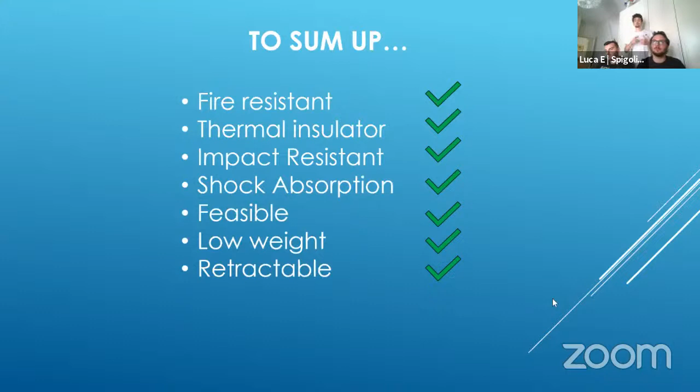So to sum up, our product is fire resistant, is a thermal insulator, is impact resistant, the shock absorption of our gloves is very good, and the feasibility is absolutely good. The weight is not too much - one glove weighs only a little bit more than 200 grams, and it is retractable. As a team, we are very happy because we respected all the tasks using a very simple geometry and very simple material, and this makes us sure that our prototype is able to work and be produced without any problem.

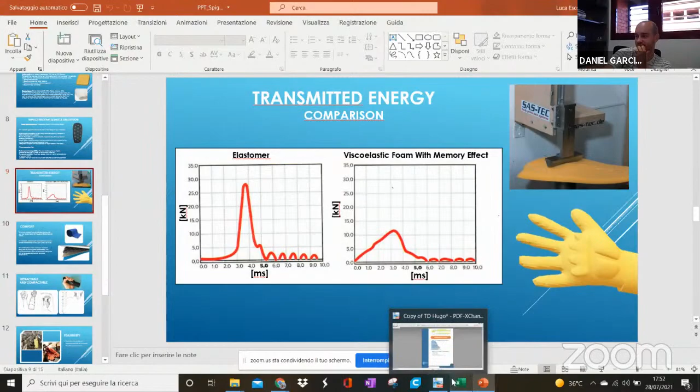Okay, thank you very much, and congrats again. Thank you. Congratulations, thank you. I think the work was nice, the presentation was clear.

I also found a lot of quantitative details. You don't mention much about the price, how much would it cost? Okay, so we didn't work a lot on the price, only because it wasn't a task, but we are sure that the cost is more or less elevated, because all the materials we used are commonly used in firefighter equipment, or in sports equipment, so it could be in line with the cost of that kind of equipment. Also the processes used in the textile industry are commonly used, so probably we only need the textile production, and the layer for the impact attenuator is made of a very flexible material, easy to be sewn, shaped in any form, because at the base of production it's in liquid form. So it can be stamped into the shape we need, and it's not very difficult to obtain.

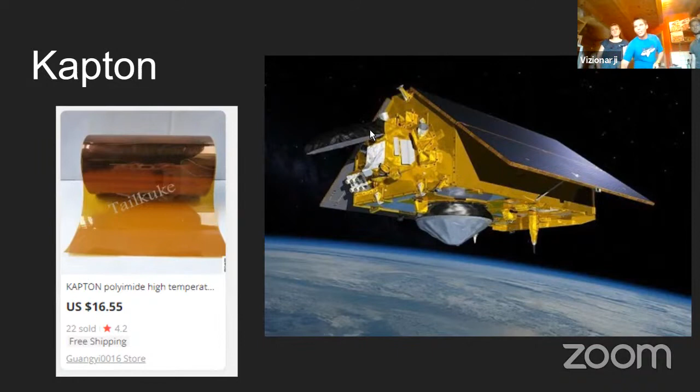Let me tell you what we were inspired by. We were inspired by air and air bubbles, and you will soon see why. The materials we've used: first one is cotton, which is comfortable on the skin, and that's pretty much why we used it for the bottom layer. Then we have Kapton, a foil which is also used in aerospace applications. It's a very fancy foil, it has very good heat resistance, and it works very good for that. Then we have Kevlar reinforced rubber.

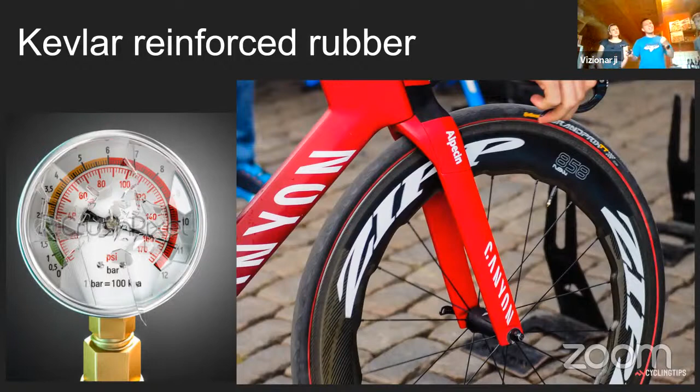So that's the interesting part we didn't hear today yet. If you fill up Kevlar reinforced rubber with 10 bars of air pressure, it's hard as a rock. If you ever felt a road bike tire, it's hard as a rock, believe me. Then we have Kevlar fabric, which is very good for slash attacks with swords. It's also very heat resistant, it doesn't burn that easily. And it's also used in bulletproof vests, so you could say it has unlimited power.

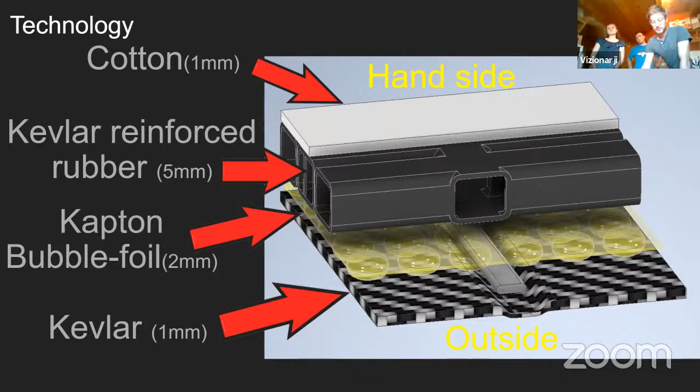Okay, so we created two different arrangements. The first one, shown in the picture, is designed for less movable parts of the arm and is more force resistant. It consists of a thin cotton glove, inflatable rubber skeleton, Kapton bubble wrap, and a layer of Kevlar fabric. You can see that the thickness does not exceed 10 millimeters.

And now, how is this implemented in our glove? Firstly, we start with a cotton glove on which the already mentioned high pressure rubber is put, on the parts of the glove which ensure great rigidity and are protected against bigger dangers that can hit us. Then on top of this, Kapton bubble wrap or tubes are put as a heat-resistant material and good heat isolator. On top of that, we put a Kevlar sheet, which additionally protects us against any cuts and other things. And lastly, we put a few metal rings that finalize our product.

And why do we even have metal rings? Our glove can open up to the wrist, so we can easily put our hand into it. We firstly start with the deflated device, put our hand into it, and buckle up our rings. Once all the rubber is pressurized, the geometries inside the rubber, as shown before, simply force the rubber on the outside to form the circle and tighten up all the rings.

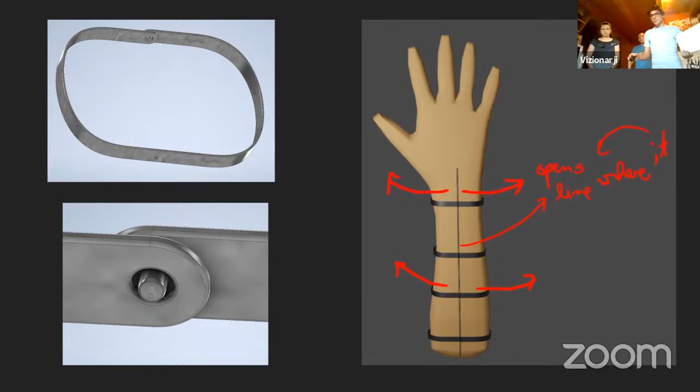So here is an image of how the inside of the glove moves. We can see how joints spread out with the hand movement. The outside of the glove is movable just like a normal glove.

So our glove is portable. You can fit it in a small box, pump it, and then it stays firmly on the hand and protects you against outside forces.

So thank you, that's all. So now the questions, please.

Well, first of all, congratulations. I think you have developed a good job and a good proposal. I think it's feasible, and why not? This option could be real. And my only question is, can you show me please the picture with the Kevlar fabric?

Yeah, sure. It was the first one, number 3. Or... okay, this one? This one? Okay, no, the previous one. This one. This one is Kevlar fabric.

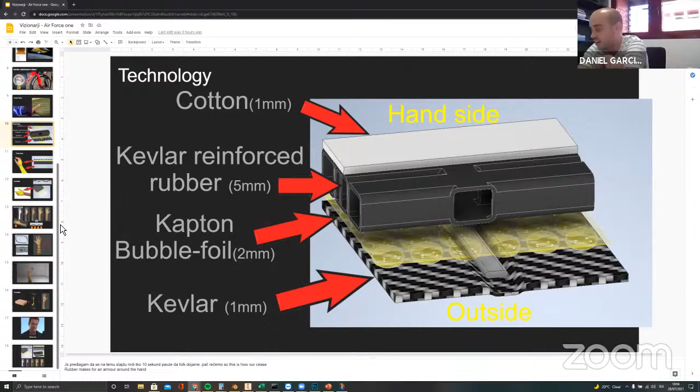Okay, thank you very much for the presentation and congratulations for the work. Actually, something I really like is that you are starting like a scientific conference, let's say, introducing a state-of-the-art kind of existing solutions and motivating the whole thing from there. So this is something I really appreciate.

So now regarding the question, my first question is regarding the bubble foil. So this is a regular one, like the bubbles we use for presents, etc., or are you thinking about something more?

No, that bubble wrap is made from Kapton foil, so it's heat resistant. And why it's bubble wrap? Because it has air in it for insulation. As we know, air is a very good insulator. Kapton bubble wrap is not realized currently on the market in big quantities, usually normal plastics are used. We just thought out of the box and thought that this should be implemented in such a case.

But like if we watch Tour de France, not many tires explode.